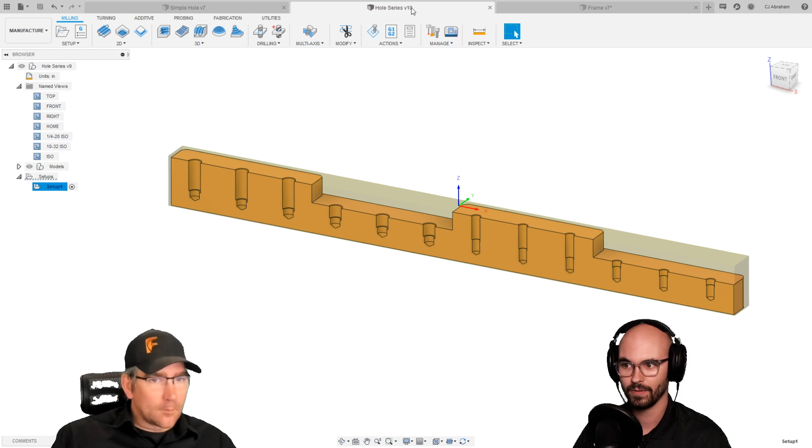And the first model I'll show you is just a simple block. To give you an idea of where we're headed, I also have a model here of a hole series, so the different ways you can select all these holes. And finally, we'll get to this part, which looks like it's all the same holes here, but there's lots of variations in there, and selecting these and getting them in the right order might be kind of a challenge.

So starting with this simple hole here, I just want to go over the different ways you can control applying a drilling operation. So I've got a section view here. We've added section view to the manufacturing workspace, which is a huge help. And I already have a setup, and I'm just going to select the drilling operation. And now we can start with our hole here. It's a 1/4 inch hole, and it has a flat bottom.

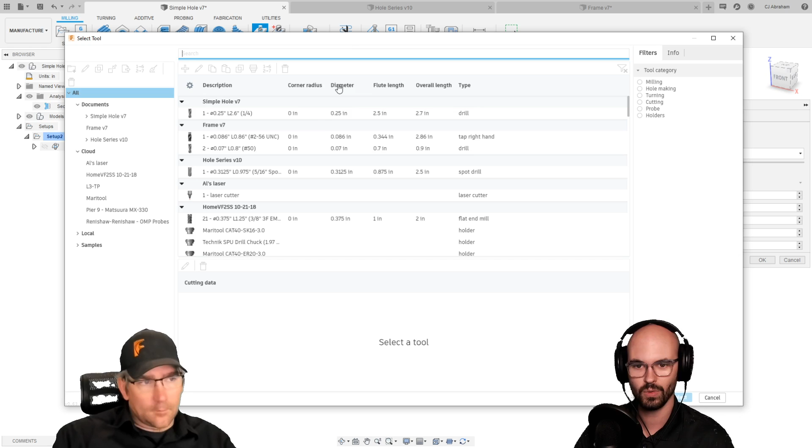And you know, when you drill holes, you have a drill tip angle, 118 degrees, 140 degrees, whatever that drill will be. There's ways to adjust that. But let's go ahead and select a 1/4 inch drill. And you can see here I'm using the new tool library preview, and I have a 1/4 inch drill already in this document. And if you want to see how to use the new tool library and all its cool filters, there's a video for that we posted the other day.

Okay, so I've got my 1/4 inch drill. I'll go over to geometry, and by default, the selection method is selected faces. So if I select the face for this hole, you'll notice that we get a selection that recognizes that hole from top to bottom. And the tool tip has gone to the hole bottom. It hasn't gone past it yet. Okay, so it automatically recognizes the top, recognizes the bottom, and the position. That's pretty easy.

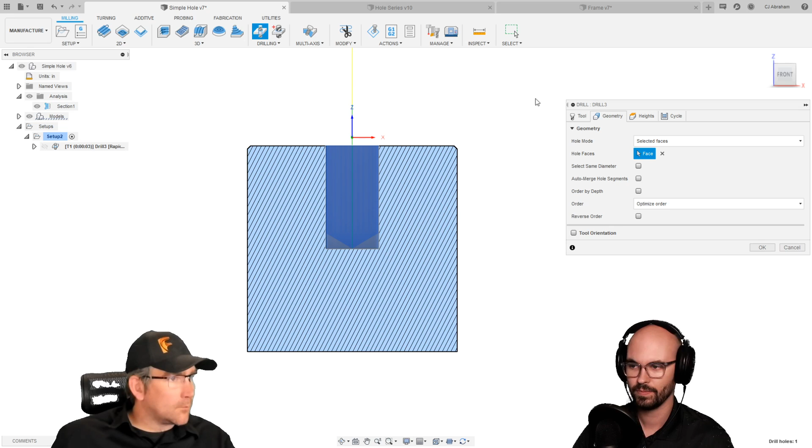If I did want the tool to go past the bottom by that angle, on the heights tab at the bottom, there's an option called drill tip through bottom. If I turn that on, you'll notice that the drill tip will now go past the bottom up to the full diameter of the drill. And this will be calculated based on the angle that you put in the tool definition. So 118 degrees, 135 degrees, 140, whatever your drill angle is, this distance will automatically be calculated.

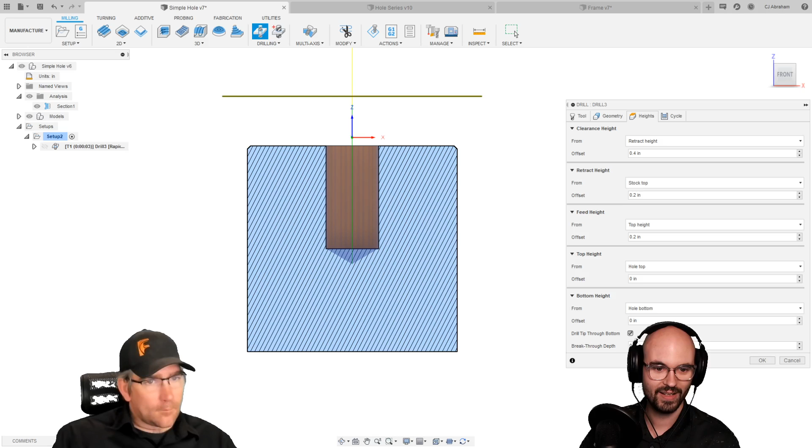And I need to hide my head because I'm in the way. I'm going to hide you too, Al.

Perfect. Hide me too. Yeah.

So this number down here, breakthrough depth, this is the additional distance that the hole is going past the bottom of the hole. So right now it's 0, which means we're not going additional distance past the bottom of the hole. If I type in, for example, 100 thousandths, you'll see it adds a distance to that preview. So the full diameter of the drill is now going 100 thousandths past the hole bottom. Okay, super easy. I'm going to set this back to 0.

And for the last basics of just having one hole, on the cycle tab, you have lots of different options for your drilling operation. We call these drilling, counterboring, chip breaking, but these are all meant to map to drill cycles on the machine. So for example, what we call counterboring is really just a drilling cycle that will dwell at the bottom of the hole and retract. Okay, so whatever drilling cycle corresponds to this selection will be posted out.

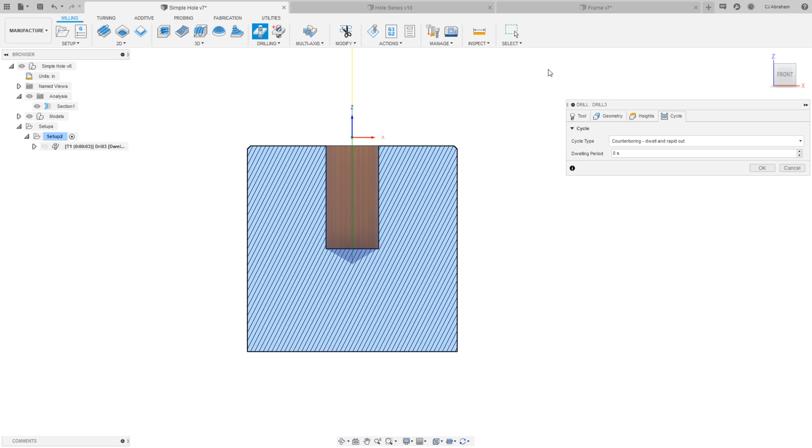Okay. A couple things to note here is that I didn't add any other features that would represent a drilled hole in real life, like a chamfer on the top of the hole, the drill angle at the bottom. We can add those back in. So instead of an extruded hole like this, let's suppress that feature. In the design workspace, I can add a hole. So I just need to have a single point here.

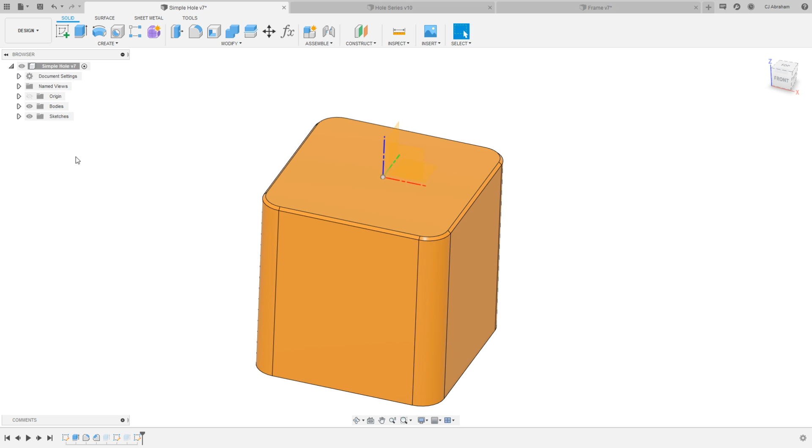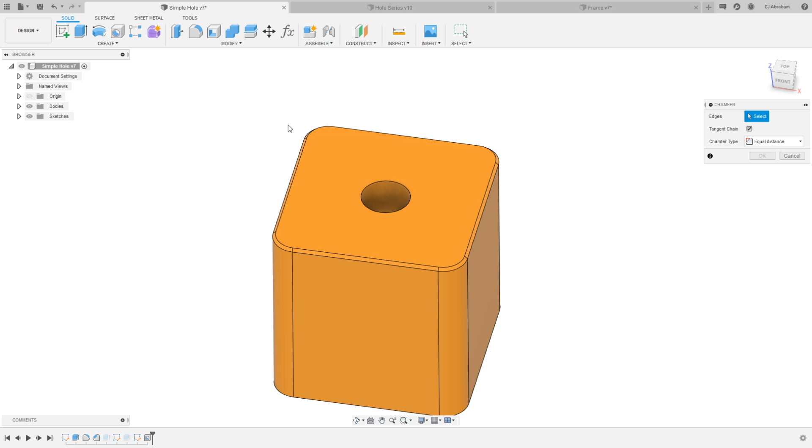Okay, finish that. If I go to create and use the hole command, I could then select the position that I want for that hole. It'll place it right there. And when you use the hole command, you do get the option to add a drill tip angle. And then once I create that hole, I can also add a chamfer feature on top. 15 thou chamfers are about my favorite size.

And now back in the manufacture workspace, if I look at the section view, we have the chamfer on top, we have the drill tip on the bottom there. So what does it look like to select the face of this hole for this drilling operation? Let's go ahead and select our tool again. All right, so now I'm going to select that same face, but there's a couple of things we need to make sure of. So one, you'll notice that the hole top and bottom is now only recognized to be the face that we selected. It doesn't include that chamfer at the top, and it doesn't include the drill tip angle at the bottom.

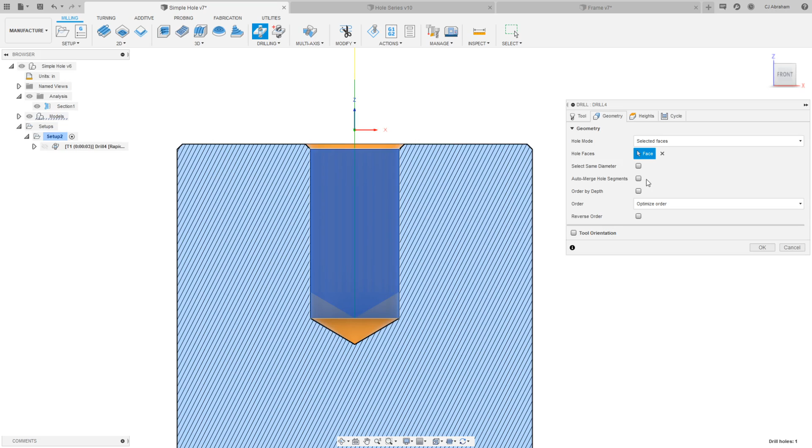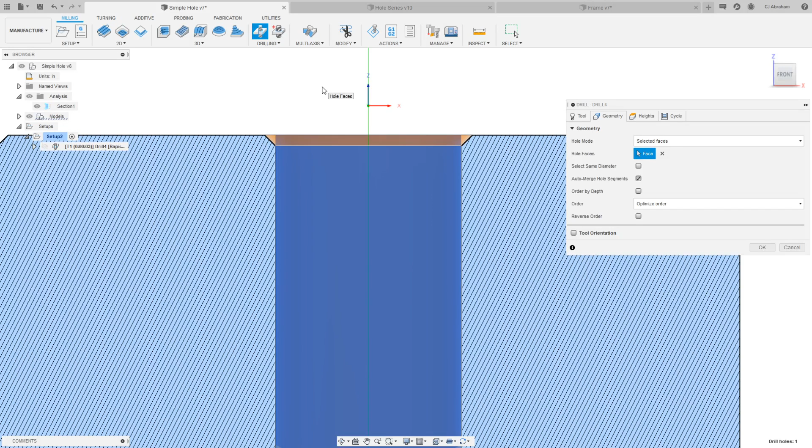If I turn on this checkbox here, auto merge hole segments, it was kind of faint there, but what it does is it looks at the hole that you've selected and it will work its way up the model until it no longer finds concentric features anymore. So this is really handy if you're doing counterbore holes because you can select the drill diameter, or you can select the face for the through hole. And when you turn on auto merge hole segments, it will recognize the entire hole feature from top to bottom instead of just that segment you've selected.

Okay. And again, to drill the tip through the bottom, I just need to turn on this checkbox. And you can see there it matches up perfectly. I've used a 118 degree drill. The feature was made to be 118 degrees. So that's really nice.

And while we're here, I want to point out something that might be confusing to users using the drill operation for the first time. You'll notice that the green line here, which represents the area that the tool will feed, we start feeding the drill way off the top of the hole. And that's because the feed height is set by default to be 200 thousandths from the top height. Note that all of these heights are relative to each other. So we have the top height as the hole top, and the feed height, which is the plane that the tool starts feeding from, is 200 thousandths above the hole top.

If I set that to 0 and zoom in a bit here, you'll see the green line has dropped. It might be kind of faint for some users. Sorry if it's too faint on the video.

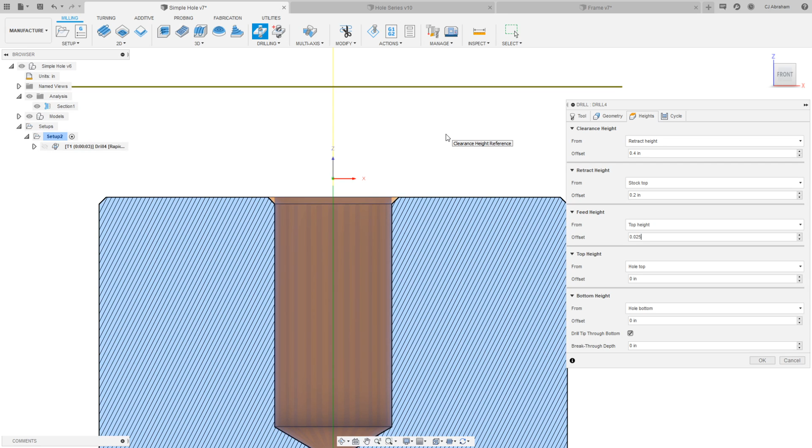But now the tool is starting exactly on the hole top, which might not be desirable because it rapids up to that point. So it's usually good to include a small distance in the feed height. That way you don't rapid all the way up to the face and then start drilling. Handy tip for someone that might be confused by that.

Al, anything you want me to include here? No questions yet. I think so far people are picking up just fine, CJ.

Great. Okay, so with the basics, you know what might be interesting though, now that you've got the heights shown, just show how those heights are relative to each other. So if you adjust maybe the feed plane, show how the retract plane can be related to the clearance plane, is related to the retract height, for example. Yeah, so the most obvious one right now is that I have the retract height and the clearance plane shown, and if I drag one, it moves the other.

All right, so if I type in a number like 375, nope, I hit enter too quick there. So if I change this number, it changes the other relevant planes.

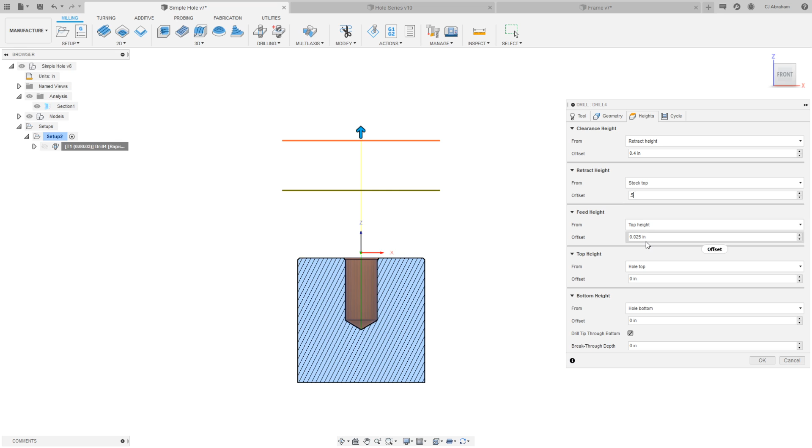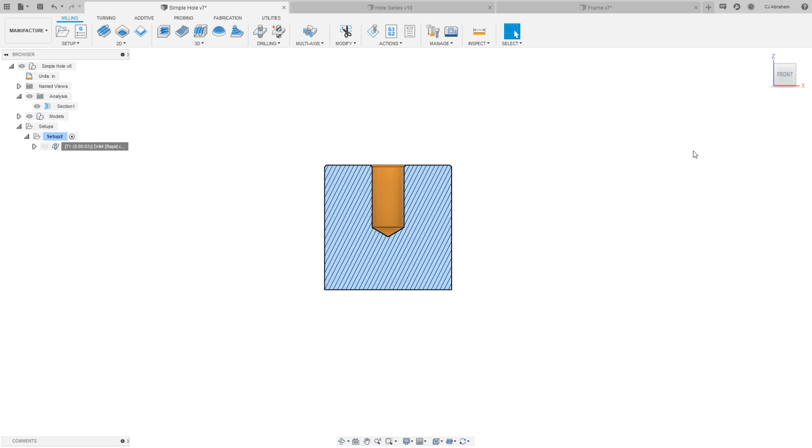When the plane is relative to a feature on the part, the plane is not shown. So for example, the feed height right now is shown from the top height, so it's not showing that plane. If I said, let's say from model top, see now it shows the plane. Okay, that's a helpful tip if you're wondering why those planes weren't shown. Good. I think that's the basics. Let's jump into some more interesting stuff.

Yeah. So selecting multiple holes is really where the drilling operation starts to shine. We can do all the selections that we want for one hole, and it will automatically detect all the other instances of the hole, whether that be the same diameter, distance, and things like that. On this particular part, I have two sets of holes. The 6 holes on the left are 1/4-20. The 6 holes on the right are 10-32. So let's just start with the 1/4-20 holes over here.

The way I've modeled this is I have the minor diameter drill, and then I have the major diameter for the tap. And this is handy to model because once you select these, you can modify them in the design workspace, and your hole depths automatically will adjust the drilling operations. So let's start with spotting these holes.

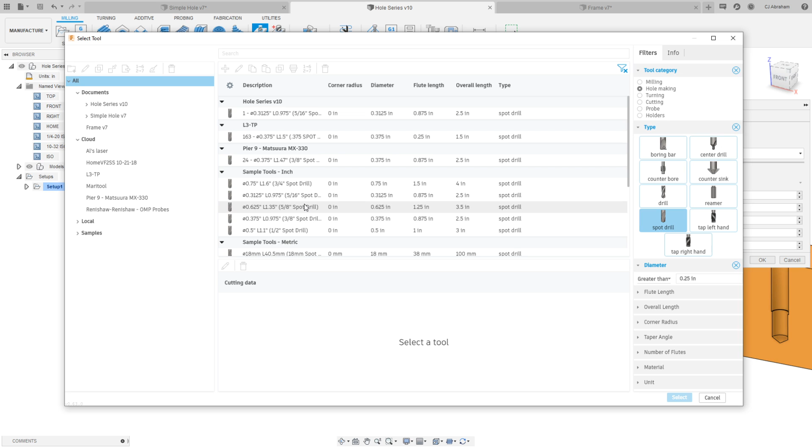So I'm going to select a tool. I don't have a spot drill in this operation or this document yet. So I'm going to look for a spot drill. And I want the diameter of the spot drill to be greater than 1/4 inch. So now I'm looking at all spot drills available in any of my libraries. So let's go ahead and use this 3/8 spot drill. Okay, so I've got my spot drill.

Go over to geometry. And on this part, I already have a chamfer on the top of the hole. It's pretty common that if you select a hole and you want to get a specific diameter on there, you have to calculate using trig to figure out how deep your spot drill needs to go for the angle and things like that. In Fusion, all you need to do is select the face, and it will automatically detect the depth that it needs to go to.

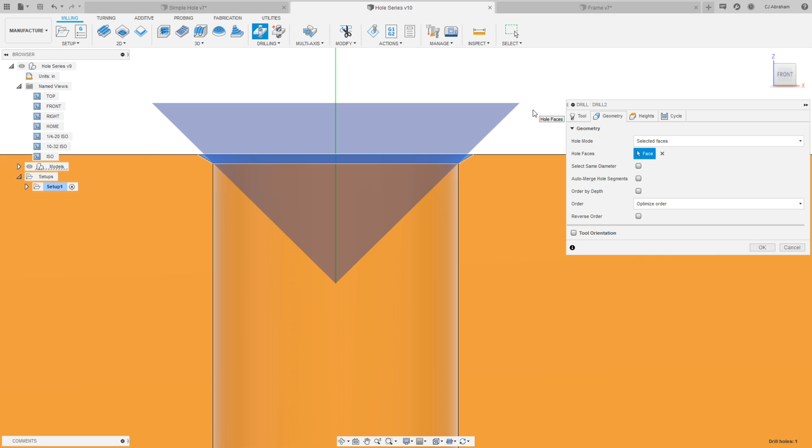And I've modeled that chamfer as a 120-degree chamfer. I like to use 120 degrees when I'm doing tapped holes. And I've selected a 90-degree spot drill. So you can see it's automatically gone to the depth that it can in order to not violate that feature, in this case, the bottom of that chamfer. And that was determined by just declaring the bottom height to be the hole bottom.

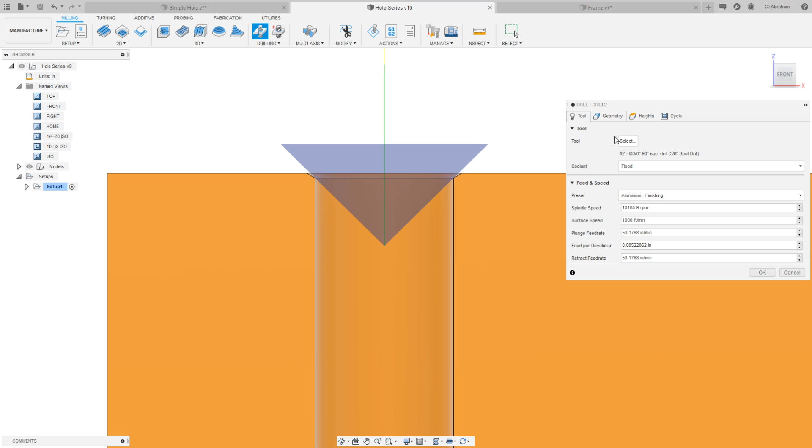Also, right now I have that tool as a virtual sharp, so a 90-degree zero diameter tip. If I go back to the tool definition, so let's take a look at our hole series. Looks like I already had a spot drill in there actually.

If I edit this tool and go to the cutter tab and look for tip diameter, this value here, I could put in something like 50 thousandths. Maybe it was a little hard to see on the preview there, but now the tip of the spot drill is flat, which is extremely common for these tools. And that will automatically be calculated and included.

Okay. And just as a quick aside, sometimes it doesn't seem like it's important to dimension that flat when you're modeling it inside of the CAM system. But the reality is that that endpoint of the tool is how you're going to touch the tool off in the machine. And if the tool is touched off at the wrong distance, you're going to end up with these kind of spot drills or chamfers that are the wrong size.

And also, if you use that tool to chamfer the edge of the part, you'll end up with something that's not the same size. And people often miss. The reason for that is in the CAM system, you didn't define the width of that flat, and it thought the tool was a different length than it actually is. Exactly.

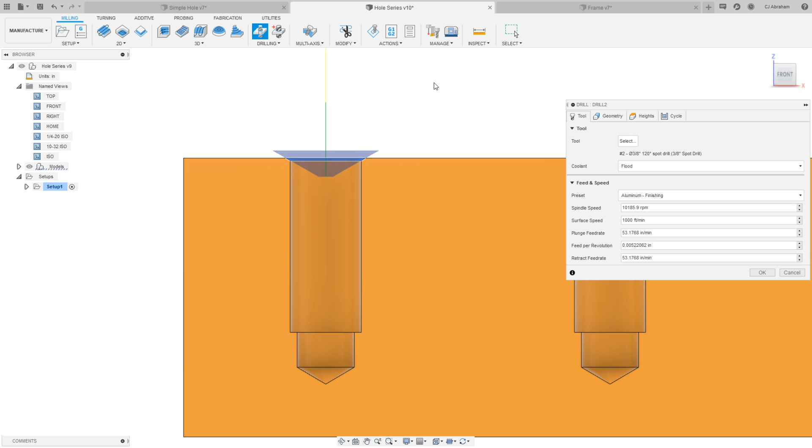Okay. Let's see. Now that we've got our spotting operation, I just did that for one, right? Let's go back to an ISO view of this whole thing. I just did that one spot drill operation on that one hole, and I wanted to include at least all of the holes for the quarter 20s. So if I turn on the checkbox, select same diameter, it finds all the same diameter holes, or in this case chamfers, that are on this part. So it found all 6, including the ones that were at different heights.

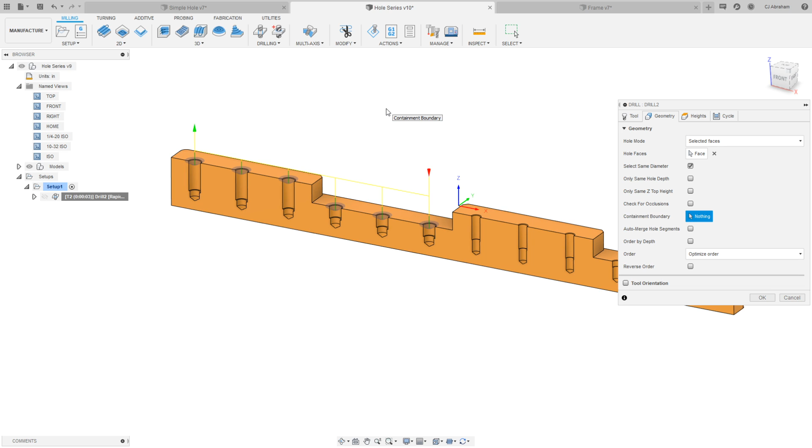And right now it's ordering them from right to left, which is okay. This would mean that all 3 on the right get included and get posted in their own canned cycle, and then the left 3 would. If we were on a part where the instances were staggered, we can separate those out by the canned cycle, and I'll show you that in the next part because they are staggered in that one.

Let's say that I also wanted to spot drill the holes on the right for the 10-32. I could easily do that by including one of these chamfer faces in the selection. So by clicking on that chamfer, I'm both cutting the chamfers for the quarter 20 holes and for the 10-32 holes, and it's automatically detected the depth between the two. So this chamfer is being cut at a shallower depth than the quarter 20.

Let's use the named view there. Okay, so very handy. Looks like I exited the operation without saving there. Okay, so you can select multiple diameters in one drilling operation to select all of your holes.

Okay, how's chat looking so far? Any questions? Anyone want to play stump the chump? A side question about setting a default for the number of flutes in a drill. Maybe we can address that later. I'll just answer it in the chat for now. Yeah, okay. Sounds good. All right, so moving on.

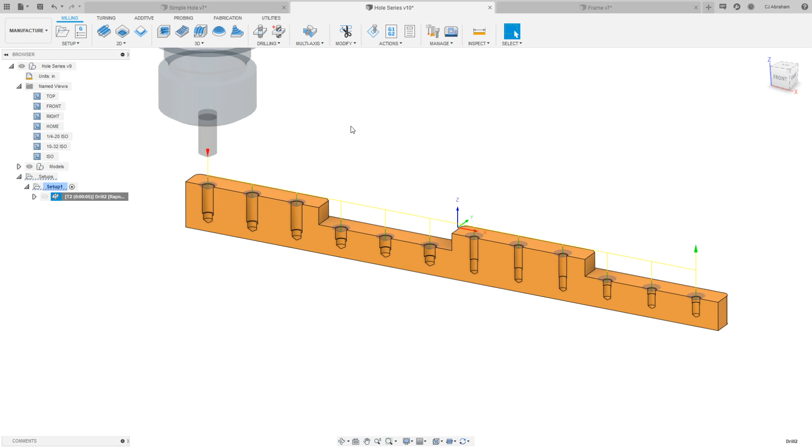Now we want to do the minor diameter drill for the quarter 20 hole. So I'm going to select the drill operation, select the tool. Again, I don't have a number. I happen to know off the top of my head it's a number 7 drill. So I'm going to search for a drill. And in the search bar here, I'll type in number 7. And it should show me a few here. And it does. Here's the number 7 drill.

I have some cutting data for different materials in here. The aluminum drilling preset will work just fine. These are for high-speed steel. If you have carbide drills, obviously, you can push them much faster. Go over to geometry now, and I'm going to select the face that represents the minor diameter. Okay, and let's zoom in on that.

And you can see right now it's currently rapiding to almost the bottom of that hole and then doing that one section. So we want to turn on auto merge hole segments, and you can see that automatically found all the other concentric segments that went up to the top of the model. I'm going to turn on drill tip through bottom. Okay, so that's exactly what I want there. And then I'll turn on select same diameter.

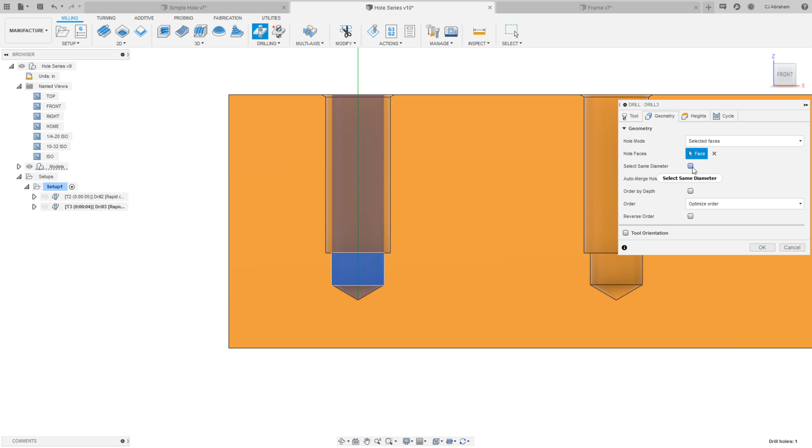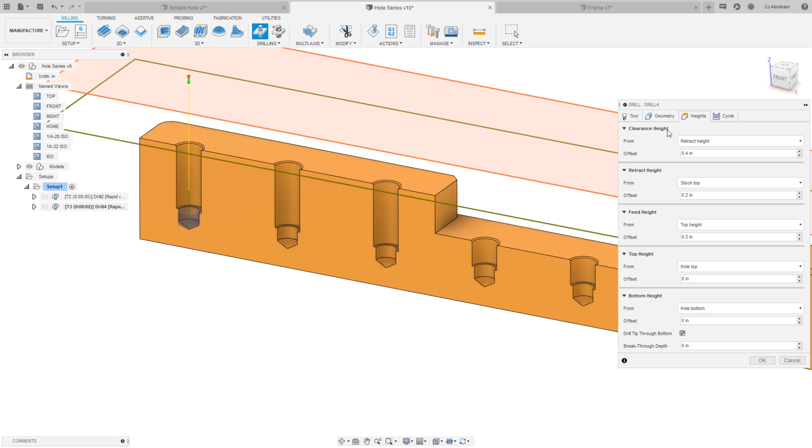And let's zoom out here and see what happened. Oh, I clicked the named view and it bumped me out of the operation. Let's try that one more time. It's much quicker when I go through it the second time. And auto merge hole segments.

Okay. So you can see when I have all those settings enabled, it found all of the same diameter holes, and it also detected the correct top to bottom distance of each hole. So through one selection, I was able to drill all the holes on the left and all the holes on the right. However, let's say that you really needed to separate out the selections of these because maybe you needed a longer drill for one and a shorter drill for the other, or you want to inspect them differently.

There's all sorts of reasons that you will want to control what you're including. So let's edit this operation, go back to the geometry tab, zoom out a bit so we can see. And you'll notice that when we turn on the select same diameter checkbox, there's some options that appear and disappear. And the two that I want to point out here, one is hole depth, so only same hole depth. And then the next one is only same Z top height.

Okay, so the same hole depth, what that does is it will only find holes that go the same top to bottom distance. So not the same absolute Z depth. What it's looking for is, in this case, any hole, like on the left, I have the hole going, for example, 3/4 of an inch. So it will look for any holes that are going 3/4 of an inch deep, regardless of where the hole starts. Okay. And I can't demo that right here because I don't have any holes that are different in that respect.

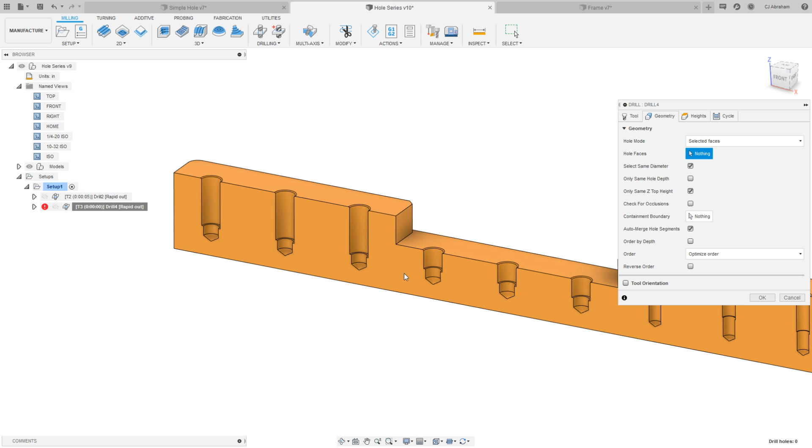But I have this option, select same Z top height. Okay. So, oh, actually, that's kind of a problem right now because the selection's all the same top height. But if I include this guy in here, okay, despite the same diameter being on all these other holes over here, it's only finding these holes because they are starting at the same Z top height. If I uncheck that, of course it finds the other ones. Okay, so that's really handy if you're trying to select as many holes as you can automatically, but be smart about which ones you want to include.

And why would you do that? I mean, I can think of one example. Maybe on the deeper holes, you're using a different drill, or maybe a pecking cycle on the deeper holes. Just trying to give some examples of why you might want to do that. Yeah, you might want to change the drilling cycle type. You might need to dwell in one longer. You might need to take larger pecks in another. You might need to use a different tool. I mentioned that one earlier. Maybe you want to select a different tool for different depths of holes.

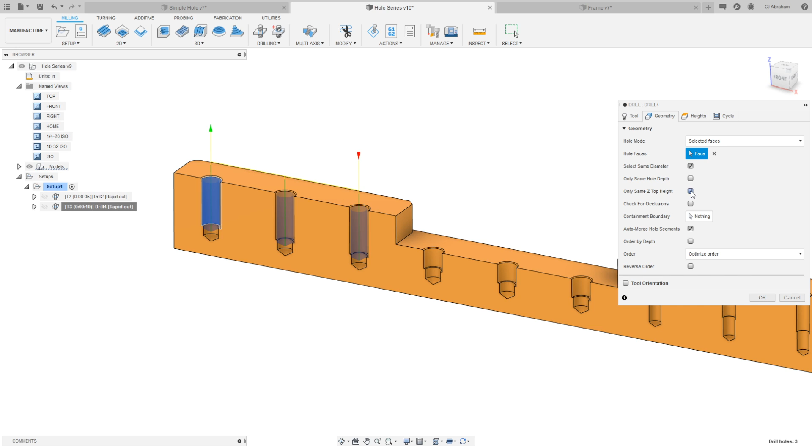Another one could be like on the part that I'm going to show next. On the real part that I made that inspired that one, I had to inspect the holes in the order that they were cut. So I'd have to cut the holes, inspect them, sign off on that, and then run the next ones. That was just part of the inspection process for that part. So there could be non-machining, not strictly machining reasons you might want to order things in a particular way or include or exclude.

The next one that is pretty special is the containment boundary. So let's select this minor diameter one here at the bottom again so we get our holes. The containment boundary allows you to select an area that limits the hole selection. So right now I've got that, so that's going to exclude it. I think I'll need to draw a boundary. So I'm going to design. I'm going to draw a sketch, and I'll just draw a rectangle around these holes. Right now it's not important to dimension it or anything.

But if I edit this operation, go to geometry, and then make a selection for containment boundary, notice only holes that are in this containment boundary are included in the same diameter selection. So this could be good if you need to also exclude specific holes. You can draw a boundary around all the holes that you want, then you draw a small contour around the holes that you want to exclude, and when you make that selection, it will include or exclude just what you need based on its location.

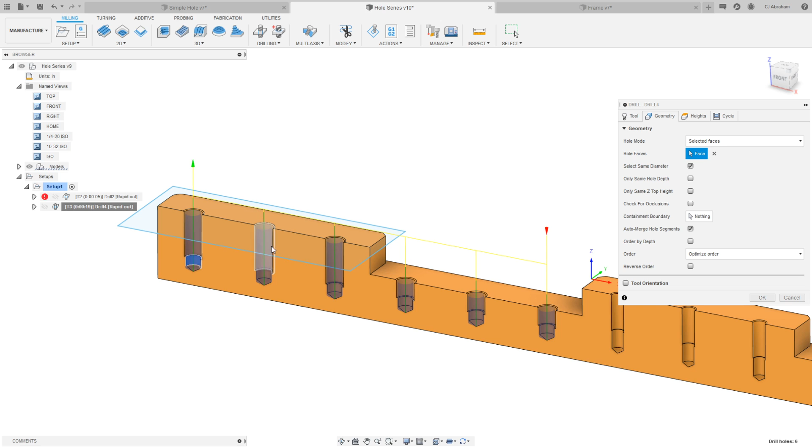Okay. We've been spending a lot of time on this one, but that's okay. Bottom line here is it's drilling all the holes that I want, so that's good. Let's go ahead and hide that sketch. And we'll move on to the tapping.

So I'm going to select a 1/4-20 tap. I can just type that in here. And I get a few options. Tim's library had some 1/4-20 options in there. The Pier 9 Matsuura library has some in there. Here's an example 1/4-20. And this time I'm just going to select the major diameter there. That gets me the depth that I want.

Turn on select same diameter. Finds all the same diameter holes. And make sure auto merge hole segments is on, so it's looking at the hole from top to bottom. And that's exactly what I want.

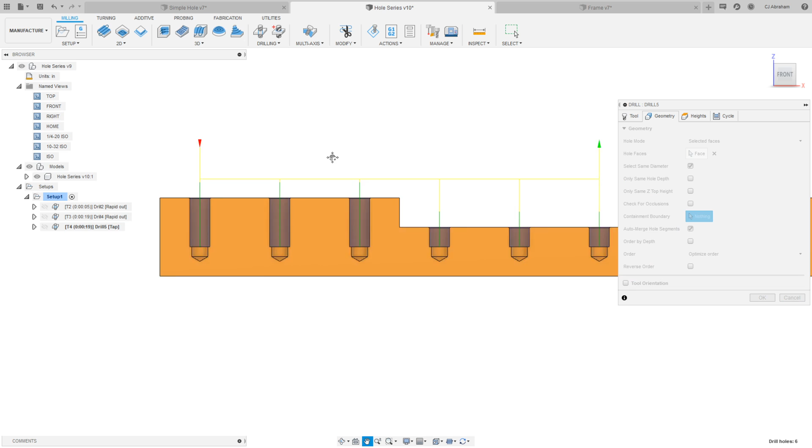Let's say that when you tap a hole, the first couple of threads aren't full threads because that's where it's entering the hole from. So let's say that you modeled this in such a way that you need this section to be all full threaded. If I go to the heights tab, there's two ways you could extend how far it's going.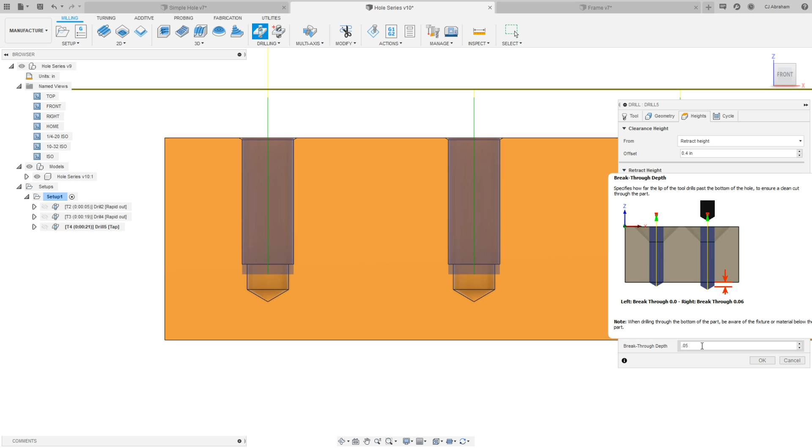You could also drill tip through bottom and specify a distance, right? So if I put in 50 thou there, it'll go 50 thousandths past the selection. So that's handy. One thing to note is that this breakthrough depth is always a positive number. The alternative method would be to leave this selection at hole bottom and put in a negative offset. So I could put in minus 50 thousandths and it does the exact same thing.

Okay, so if you're trying to select faces on the model and it's not going exactly where you want it to, you can adjust these numbers relative to the selection. Another thing to note is that in the past, I've received models and drawings where the model did not match the drawing at all. For example, a hole was modeled to be 1/2 inch deep, but they actually wanted the drill to go 3/4 of an inch deep.

If you needed to address that, you could say from hole top, I want to go minus 3/4 of an inch. Okay. So this is kind of a hybrid where I've recognized the hole top already, and on the drawing it says this needs to go this deep. So if you type in a negative value relative to the top, that'll get you exactly what you want there. I've seen that all too often where the model doesn't match the drawing exactly. So this would be a method to get around that. Okay, let's set this back to defaults.

Any other questions or things I'm missing here? There are some questions around using the hole recognition feature, and maybe we'll just keep that until the end. So I'd keep going. Okay, great.

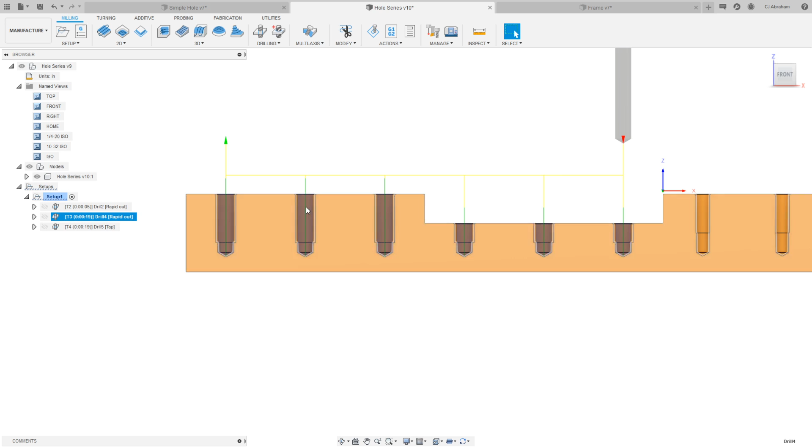And you notice through this whole process, I just did it for the 1/4-20 so far, not the 10-32, but it's not picking up the other holes there. That's because the same diameter function is very accurate. It works really great. Okay, so I think we've done enough on this model. Let's jump over to this part because I think this really demonstrates the strengths of using the select same diameter option and utilizing those switches.

So if I do a wireframe view of this part, okay, we have a couple of holes on the corner there. So there's 8 larger tapped holes, and then there's all these little 2-56 holes. And what's happening here is that there's a longer hole and a shorter hole, and the long hole on the upper and lower level are the same depth, and the shorter holes on the upper and lower levels are the same depth. Okay, I hope that's obvious.

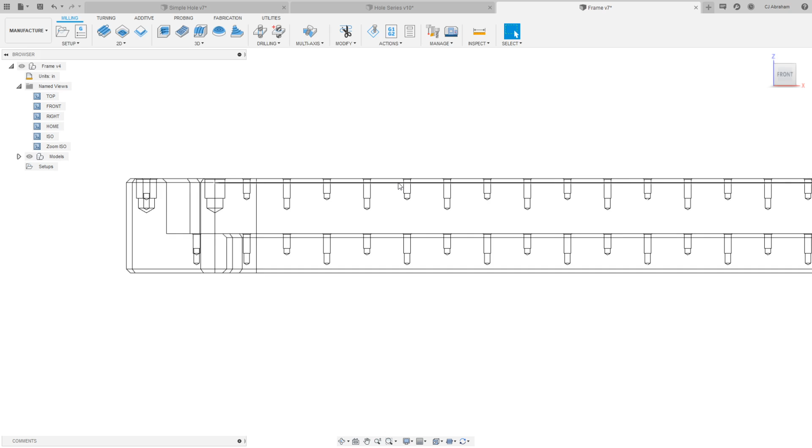But the way these are called out on the drawing, let's go back to, first let's go to an ISO view and go back to wireframe. Sorry, visible with edges. The way these are called out on the drawing is there's series A, B, C, D, and here's the short ones on the upper level, here's the short ones on the lower level.

So it's really nice to be able to separate these out per operation, especially since the real model that I got, the values called out on the drawing were not what I saw on the model. So it was important to break those out and be able to type in some values manually. But let's go ahead and spot all these holes.

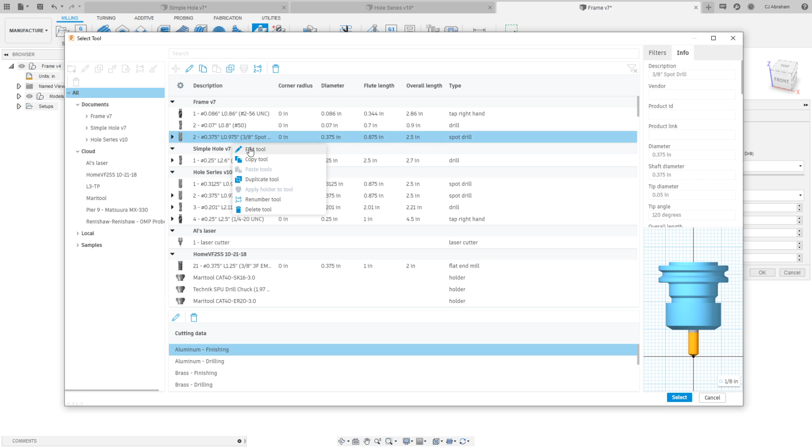And I'm going to use that 3/8 spot drill. No, that's too big actually. Let's just make sure that the tip diameter is small on that one. Okay, so leave it 120 degrees. Tip diameter, let's just make the tip diameter 10. Keep it simple. Okay, so I've got my spot drill here.

Now, instead of selecting the faces that I want for this, I'm going to change the hole mode to diameter range. So what this does, it allows me to specify a range of holes that it will look for. And let's go up to, what was the other one? Okay, so it found all those holes there.

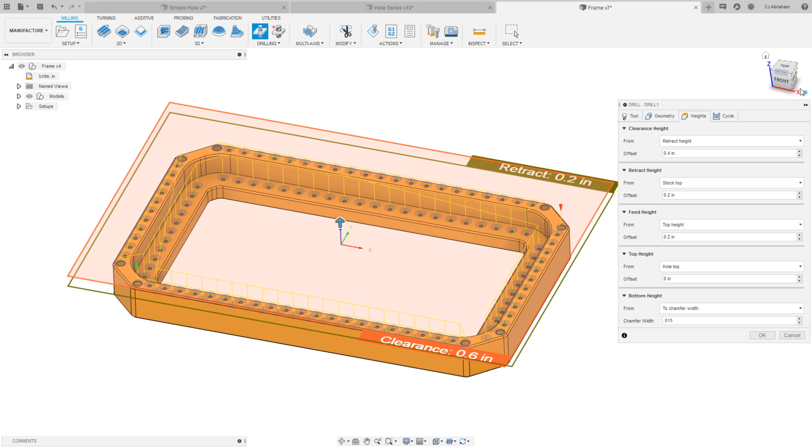And I should be able to put in a chamfer width and say I want that chamfer to be 15 thousandths. There you go. So with one operation and some intelligent geometry selections, I was able to spot all of these holes regardless of size. And let's just do a front view here to verify. Oh, actually, it looks like a couple of those... Oh, that's just because I'm looking at this 1/4 inch hole in the back here. All these other ones are perfectly fine. Looks good to me.

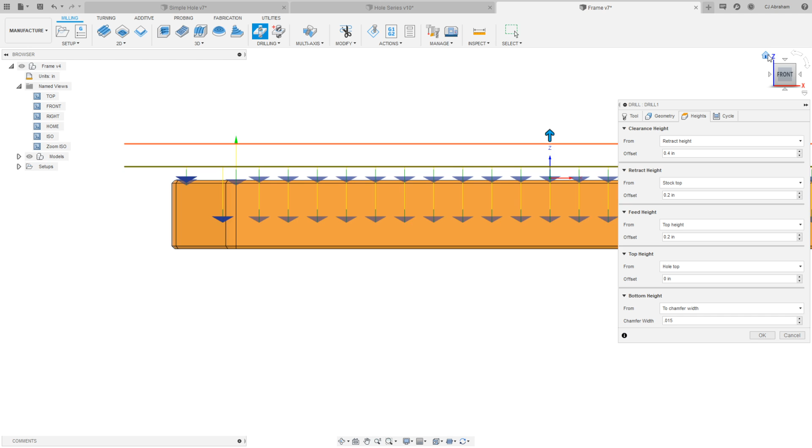Okay, so we'll keep that spot drill operation. And for the 2-56 tapped hole, it's a 70 thou diameter tap drill, which is a number 50 drill. So I need a number 50 drill. Type in 50. Gives me a couple options here. Oh, I've already got one selected, so that's good.

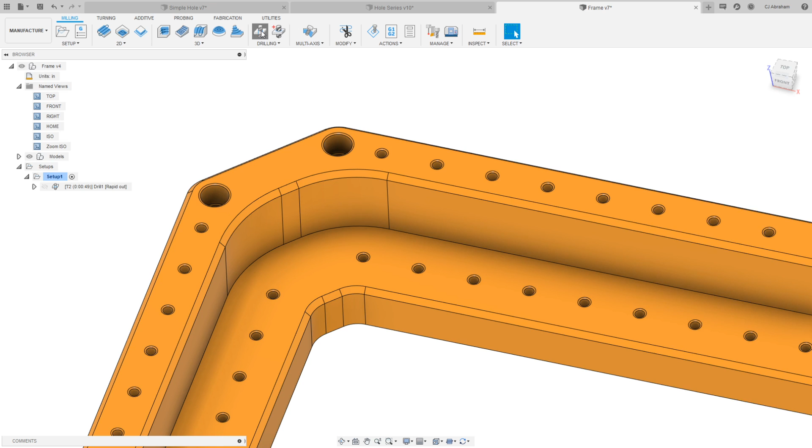Okay, so I'm going to zoom in on one of these holes, and I've modeled it the same way where I've got the minor and major diameter in here. So I'm going to make sure I just select that minor diameter. I'm really searching in there for that. Well, where'd my operation go? Just a second here. You know what? Did I lose? Oh, I don't even have the operation open. Whoops. Okay. Number 50 drill.

Zoom back in there. Okay. That's the hole that I want. Turn on auto merge hole segments. Okay. So it's looking for everything that's concentric going up. So that's good. And then I'm going to zoom back out for this, but I'm going to turn on select same diameter, and it's found everything. Okay. Which in and of itself isn't that bad. That's perfectly fine. But I do want to separate these out.

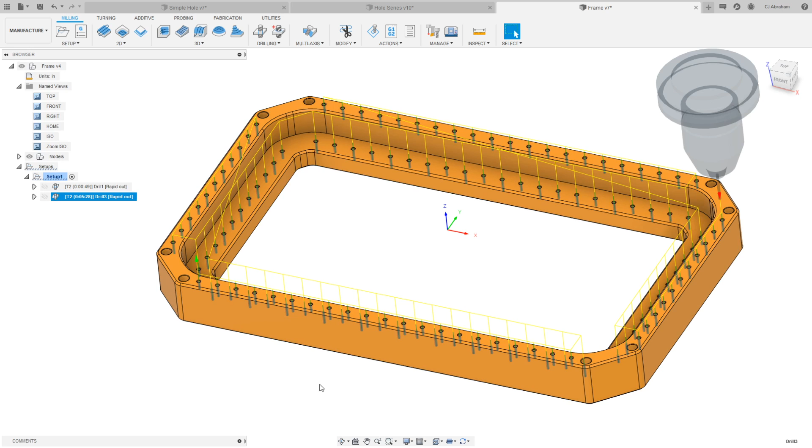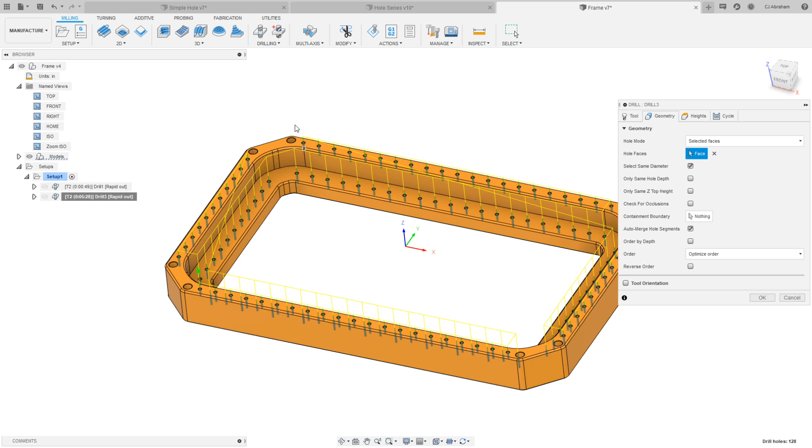And you notice it starts over here on the right, and it's kind of spiraling around the part, doing all those holes in the order that it finds. And that's because the order is optimized. And I'll check out a few of these other options. But let's just make sure that we're doing the holes that we want. So first, I only want to do the short holes on the upper level. And so this first hole that I've selected is one of the short ones. So first I'll turn on same Z top height.

Okay. And it's already pulled the same hole depth ones. And that's because the hole that I selected in there on the minor diameter starts at a different depth than these longer ones here. So actually I didn't even need to select same hole depth. Okay, so that's pretty handy there. I can call this one Series A.

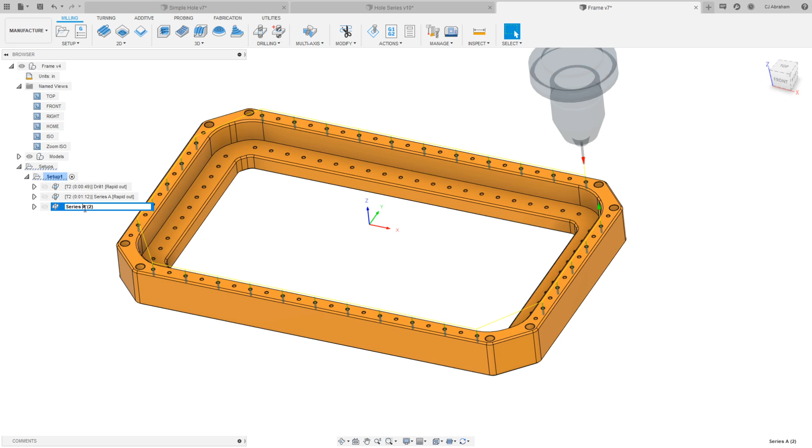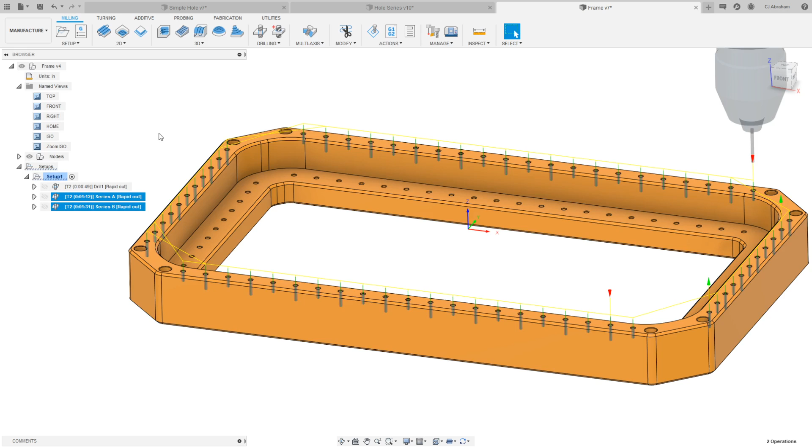And I'm going to duplicate this operation because I've got all the same settings I want already. I'll call this one Series B. And I'll just select the minor diameter on the other hole next to it. Okay, super easy. And if I highlight both those operations, you can see all those holes have been drilled, but I was able to separate them out by their depth. So I'll do the same thing 2 more times. Call this one C. Call this one D.

Select one of the holes down here for that one. Select OK. Open up the Series D operation. And I'm going quick just to demonstrate that it's really fast to do this when you're using this operation. Even without feature recognition, it was really quick to do all of those and separate them out.

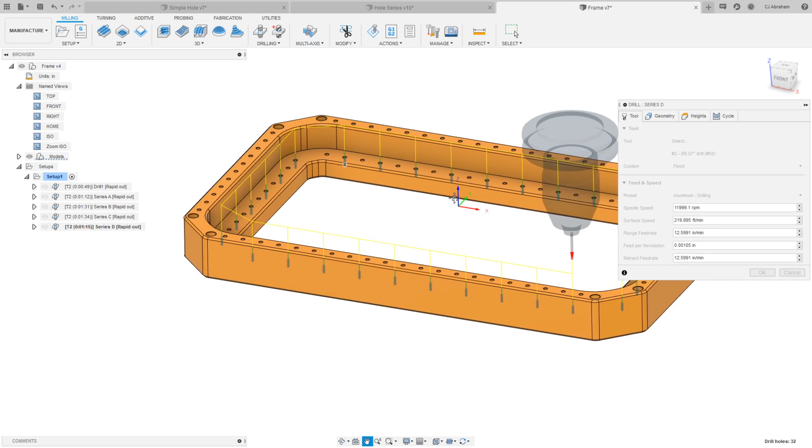And now, let's say that this whole series here, maybe it was modeled differently than it was called out on the drawing. So now just for this series, I can say, well, from the hole top, I need to be minus 200 thousandths. Right? I know it seems kind of asinine to do it this way. This isn't something we'd show at AU main stage. But when people are actually making parts, this stuff becomes really handy.

Hopefully Steve Hooper wasn't listening. Al, do you have anything you want to add to that? No, I was just following up on a few tangential questions about sketching, to be honest, in the chat. So okay. You can stay focused on the drilling side. Cool.

Well, unless someone has any specific questions they want to go over, I can get into some other more advanced things, because I have a default expression that I want to demonstrate, but it takes a minute to set up. So I don't see any specific questions yet. So why don't you do that default expression thing and walk us through that?

Okay. So there's a really cool trick that you can do regarding a default expression, a template, and the formula for tap drills. And shoot, I can't remember the gentleman that demoed this to me, but I need to make sure I give credit where credit's due. If I can find his...

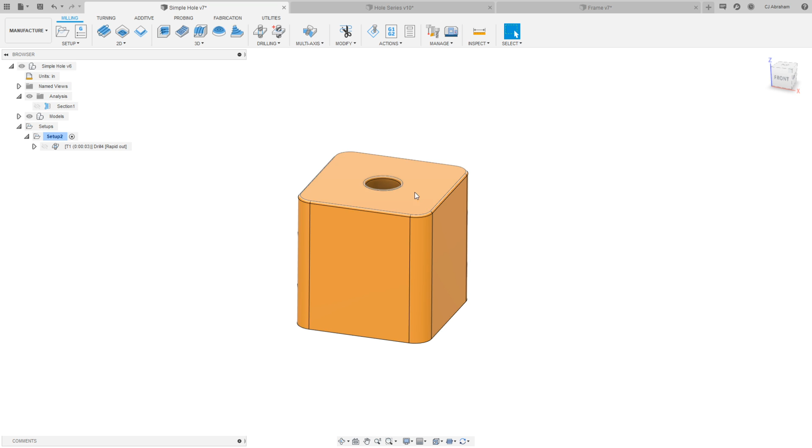Yeah, Phil Brown. I got to give kudos to Phil Brown for showing this to me, and I thought it was brilliant. So here's what we're going to do. I want to create a template operation that automatically recognizes a minor diameter hole for a 1/4-20 tap.

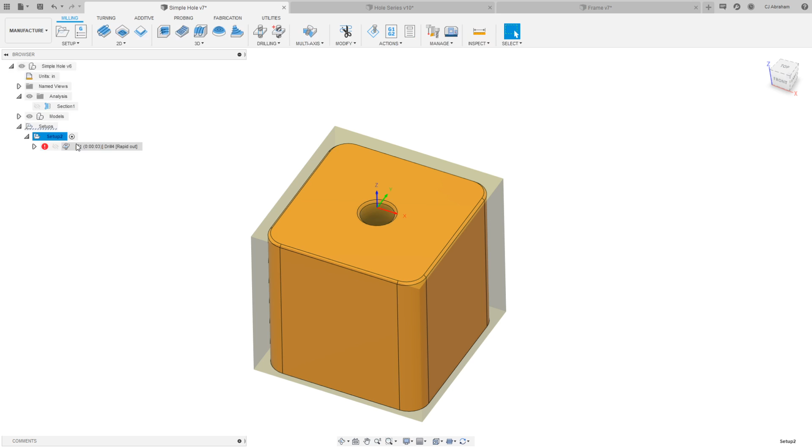And so what I'm going to do is go back to this hole feature. I need this to be 0.201. Okay, so I have a 0.201 hole here. And what I would like to happen is I would like to create an operation that when I select a tap, it automatically will calculate the minor diameter using the formula for calculating like a 75% thread, and it will automatically find the correct hole, actually regardless of whatever tap I choose.

So first I need to find what that formula is. So excuse me for a moment while I Google this. Okay. That wasn't it.

Well, the formula for metric is a lot easier than the one for imperial. Maybe I just need to do that. Let's do it for a metric diameter thread. That way I don't have to search for this giant formula, because the idea will be clear. Maybe just start walking your way into this and show how you can first link the tool diameter to the selection and then get a little more advanced.

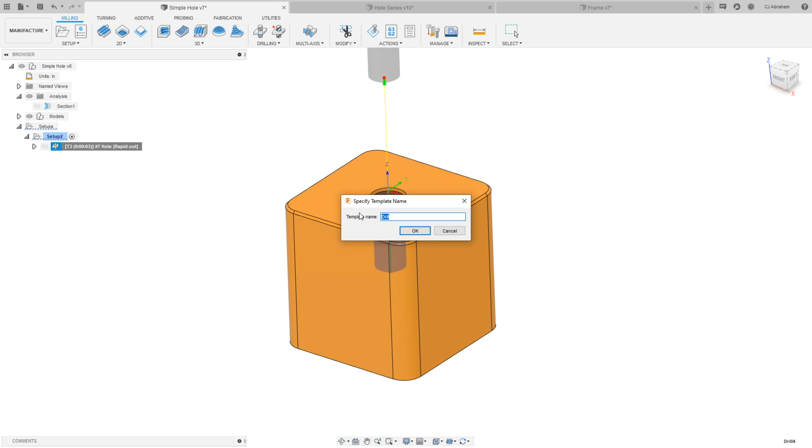Okay. So let's save this as a template. Let's call this number 7 hole. Save this as a template. So store as template. Template name will be number 7 drill. All right, we'll delete this operation and let's recall that template. So create from template number 7 drill. When I generate this operation, it detected the hole. It already found it. Okay.

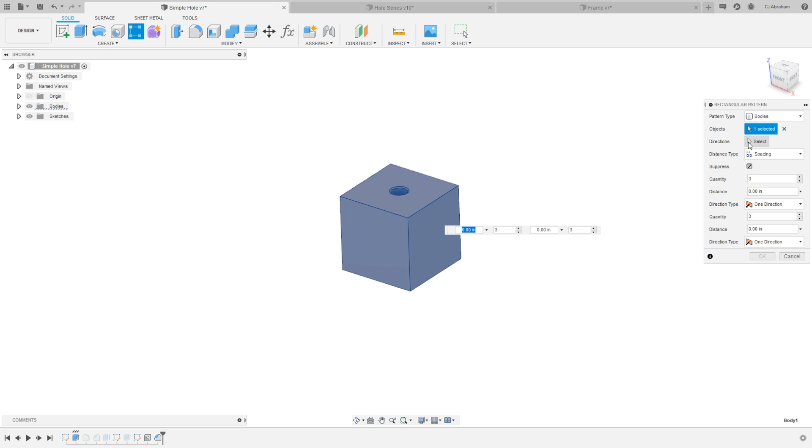So in concept, you could use this idea of putting the tool diameter in the range for an operation, and it effectively becomes an automated selecting drill operation. Let's mess around with the design a little bit. Let's suppress these features here. Let's do a linear pattern of the body. Let's do a few of these. They're 1 inch wide. And let's combine. Whoops.

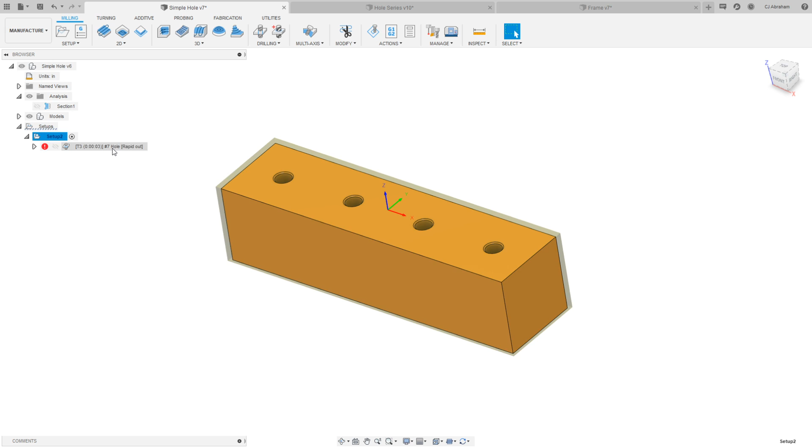Okay, so I've added some holes in there. If we go back over to manufacture, regenerate this operation, finds all the other ones. Okay, so this would have happened with select same diameter as well, but you would have had to start out by selecting a diameter. In this case, it just finds the hole based on the tool that you've selected. Maybe just draw a new part with a hole the same size and copy and paste the operation to show that. Yeah, that's a good idea.

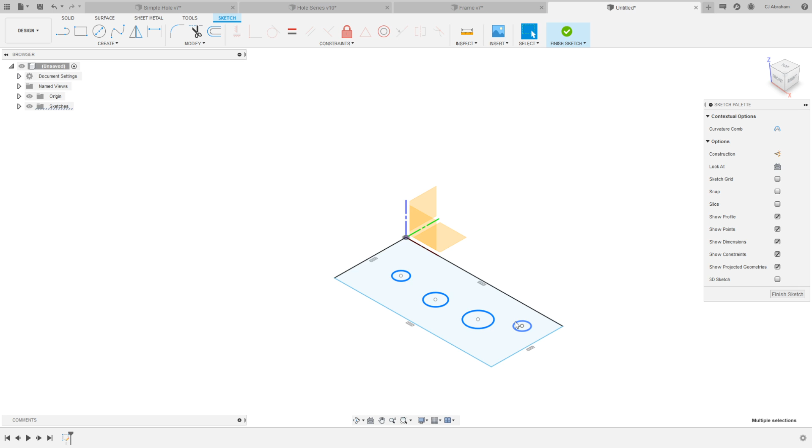Just do some random placement of those, make them equal. Okay, that looks good. Make that 2 by 1. Extrude this up. Okay. I'll create a setup so that I have something to paste into. Jump back over to this document, copy the operation. Jump back over to my new part. Oh, actually, I didn't even have to do that. I could just create from template. Sorry. But copy and paste between is also good for people to see.

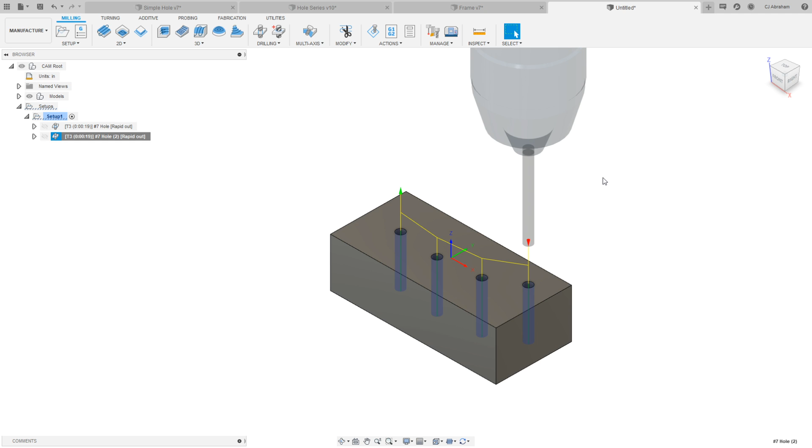Yeah. So that was an operation generated from the template. I could just as effectively paste the operation that I copied and generate that toolpath, and it makes a selection. So the way this could be used, if set up correctly, is you could have a spot operation, a minor diameter drill operation, and a tap operation be in a template. And if you're using diameter range and calculating the diameter range in this way, you have automatic selections of tap tools that do all the operations for you. Really awesome.

What you could even do is have multiple of those operations together in the same template. And if there's holes, it'll drill them. And if there's not holes, it won't. But an empty operation's fine. Exactly. If I change the diameter of these holes to something that is not the tool diameter, these operations simply just don't drill those holes. Nothing. Cool.

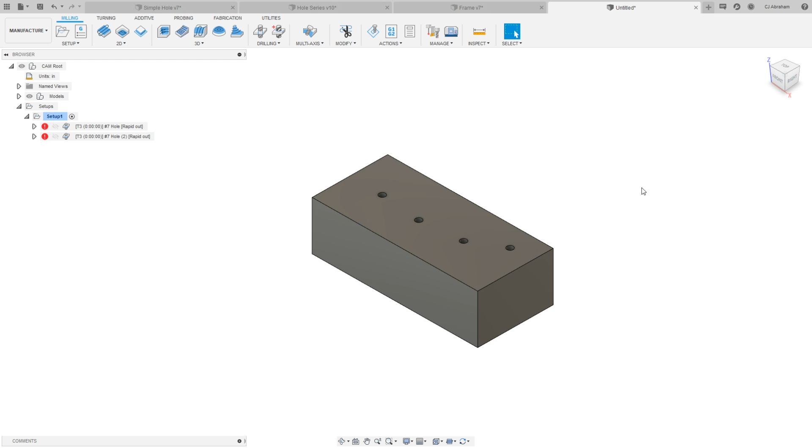That's about all the content that I have. Let's give a minute for people to ask some more questions on drilling. And while that's happening, there's a user that asked how to create text in a sketch. And it's a complete tangent, I know. Yeah. But do that for 30 seconds while the folks that are more interested in drilling spool up some questions. Perfect.

So for the text, I'll just extrude a little rectangle here. Okay. And now I'm going to start a sketch, and I will draw a line. Okay, this is where the text is going to go. And on the create dropdown, there is a text option. So if I select text, or I'm sorry, I didn't have to create that line first. That's muscle memory from something else.

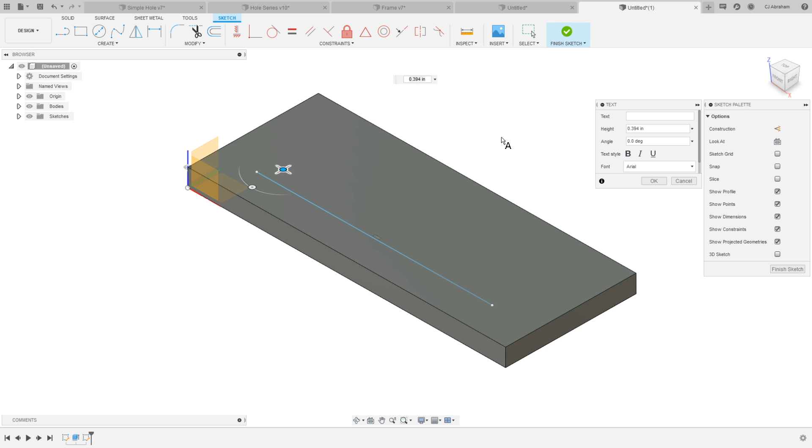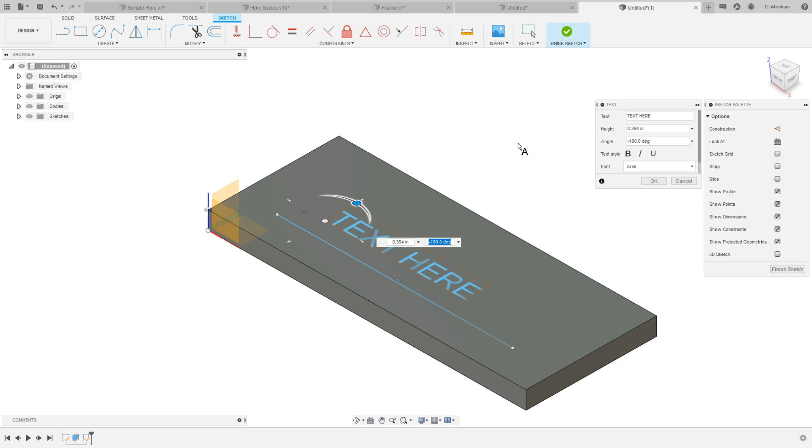But all you have to do is select the text option, determine where you want it to go using this point object here, and you can type in your text. Maybe just to kind of take this a couple steps, because we're talking about associativity and why associativity matters. Create that text, and then let's create an engrave operation selecting the text. And if you select the text properly, then when the text changes, the toolpath will update accordingly. So yeah, be a neat little thing to show.

And again, while CJ's doing that, it looks like there's some questions around templates or some excitement around templates as well as drilling. So if you've got some more specific questions about how you could use templates, feel free to throw that in the chat.

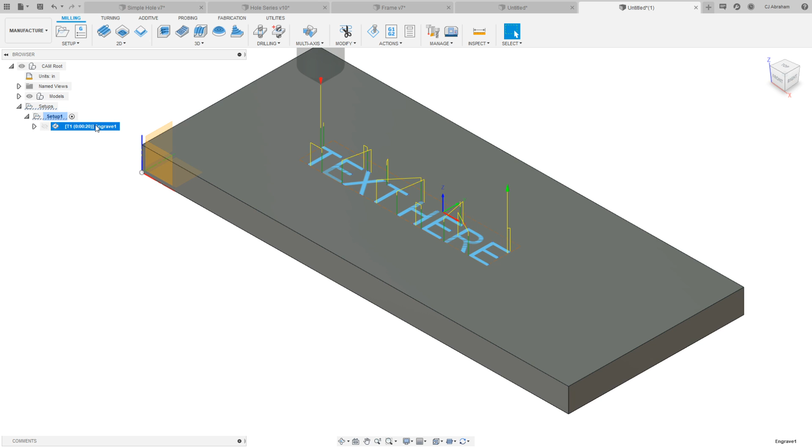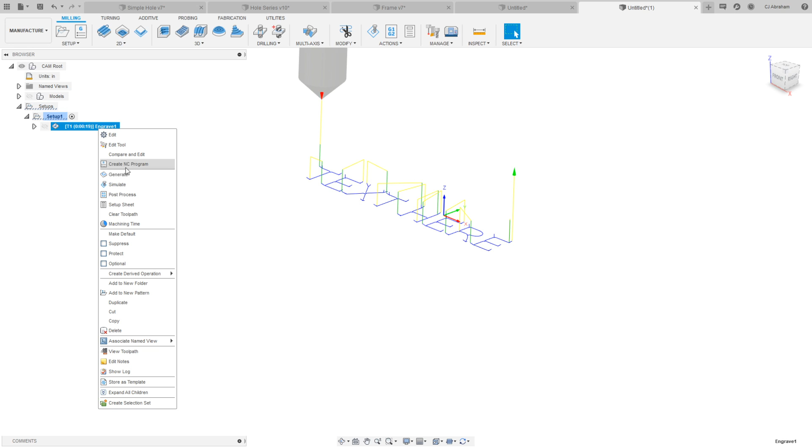Okay, and then select the text for that operation. So see, when he selected it, though, he didn't select it individually. He selected the highlighted text, and it got all of the sketch at the same time. Exactly. Bit of stock on the top that makes it look like it's cutting too deep. Yeah, that's right. Let's get rid of that from the setup there. So make all this 0. Good call out. There we go.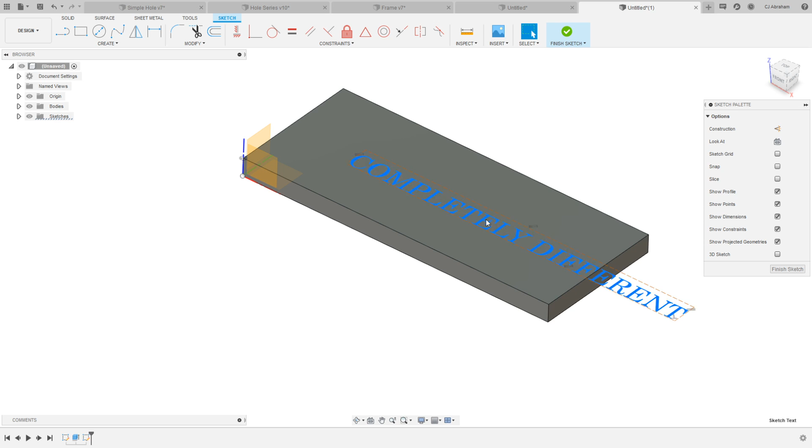Yeah, and that's just based off of selecting. I selected one letter, but it highlighted the whole text. So all of the text is included in that operation.

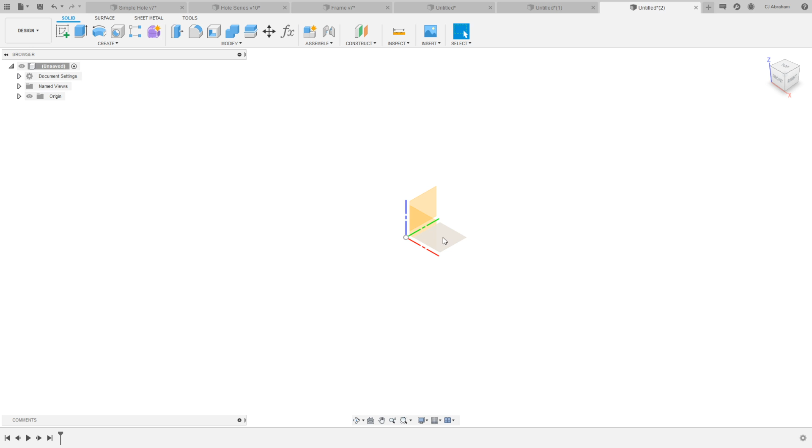Okay, I see a question. I'm just trying to understand it. The process of threading in drilled holes. So maybe show some of the tap cycles, as well as might be worthwhile showing thread mill as well. Yeah, let's make a bigger hole for that one. Yeah, and then we could actually show that the thread milling operation also has select same diameter. Yeah, which is a great improvement. Now let's just do 1/2 inch here.

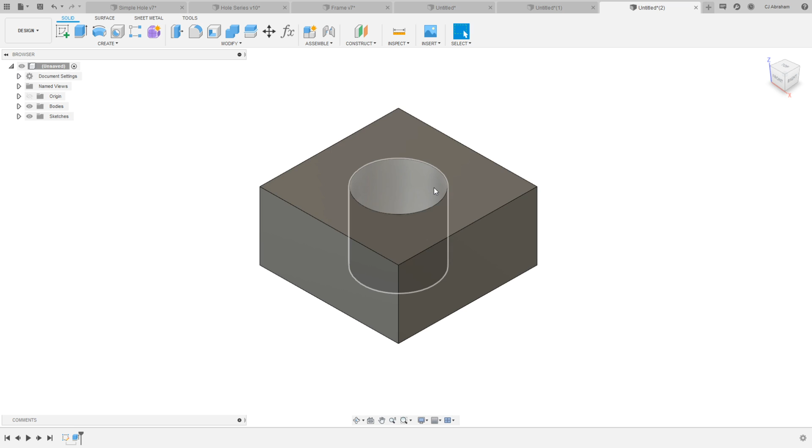Okay, so let's assume that we've already drilled this out to the minor diameter. It's a 1/2 inch. I guess a 1/2 inch 13 thread, for example, would be fine here. So if you were going to tap this. To be honest, CJ, you're getting all kinds of people excited when you started talking about metrics. So any metric examples will have the current viewers pretty excited. Oh, yeah? Okay. Well, what's an appropriate metric thread here? This would be 12. How about 12 1.5? So here we go. Instead of 1/2 inch, we're going to make this 12 millimeters. Nailed it.

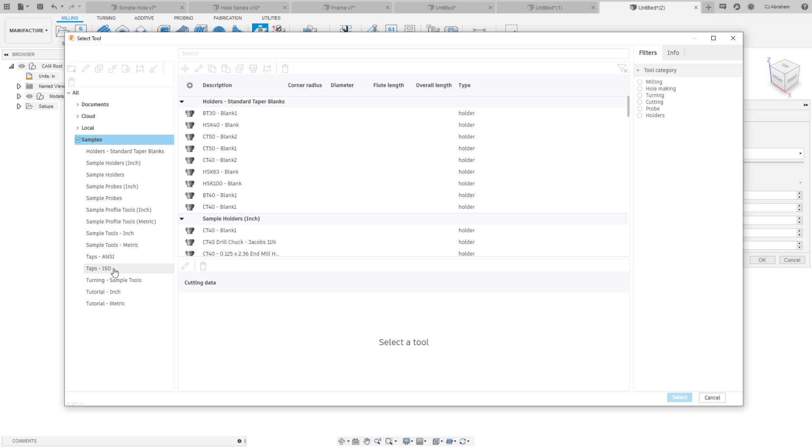Okay, so we can tap this. And we do have a couple of options for tapping. Let's look at the ISO taps. I want a 12 1.5. There we go. Okay, select the hole. I can give it a little bit of breakthrough here. And for the cycle, because I selected a tap tool, it automatically defaulted to the tapping cycle. We also can explicitly ask it to do left or right hand tapping. Generally, tapping and right tapping result in the same cycle selection in a post.

But the next one that's special is tapping with chip breaking. So this is like peck drilling, but with a tap. So it will go a specific distance with the tap, then pull back out. Then it'll go in a little deeper and come back out. Really good if you're doing hard materials, or you're worried about your tap breaking, or you're worried about chips packing in the hole, things like that. Works really well. I can attest to it working perfectly on the Haas machine already.

You would have to make sure that your post is set up to do peck tapping if you're going to use this. Sometimes it needs to be configured on a per machine basis. Next would be thread milling.

Sorry, Al, did you have something you want to say? No, you're good. Okay.

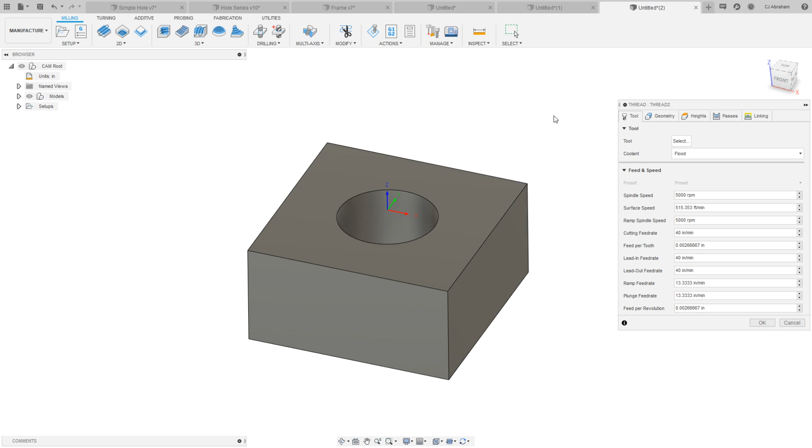So I did that kind of quick. Under 2D operations, we have the thread operation. So thread, bore, and circular are all for cutting circular features. The thread operation specifically has some settings that are nice for creating thread milled holes. And for the tool, you can choose a thread mill, or you can choose a tool type like a flat end mill or bullnose end mill or a slot mill. Basically, any mill that represents the tool that you want to use is compatible with the thread operation.

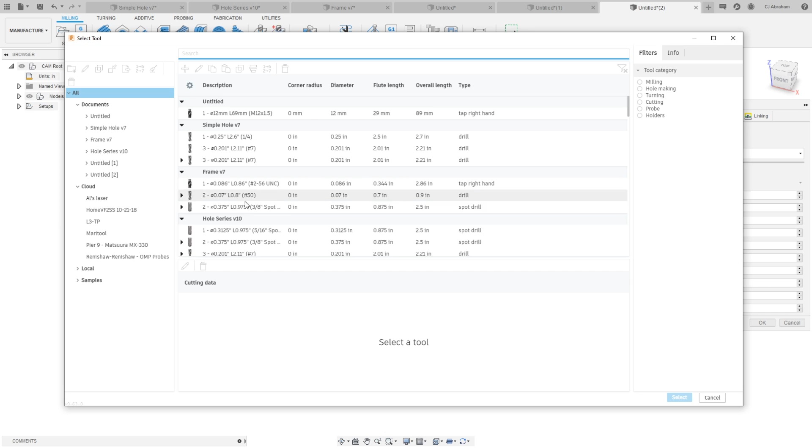So I can, for example, just make a 6mm flat end mill. Overall length, yep, that'll be fine. Okay, so we got our tool. Go into geometry, select the hole, and you see we get a preview for the thread milling operation. And we have the same select same diameter option in the thread milling operation. So if you're drilling a bunch of holes and then thread milling them out later, you have the same options to do that.

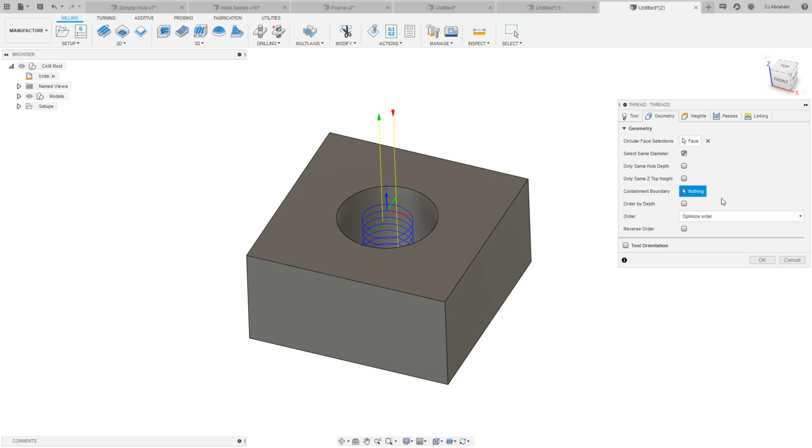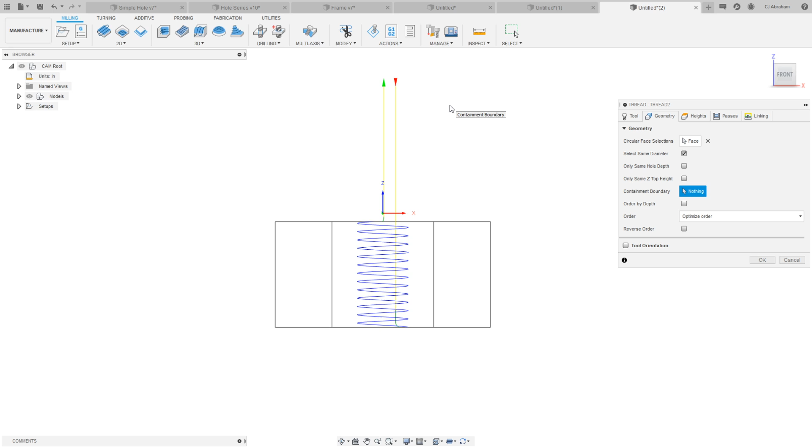Okay, that includes same hole depth, same Z level, and containment boundary. So the same selections you use in the drill operation, you can use here. As far as the heights go, you'll notice right now, if I do a wireframe view, the operation is thread milling the entire feature from bottom to top. And let's say you're using a multi-point thread mill, and you only needed to do one pass. There is a way to handle that.

And what I'm going to do right now is make all the lead values 0 so that we just see cutting. Okay, so you can see that the toolpath is starting down here on the bottom at about a 90-degree angle from us right now. And the thread pitch here, we said this is going to be M12 1.5. So it's going to be a 1.5mm thread pitch.

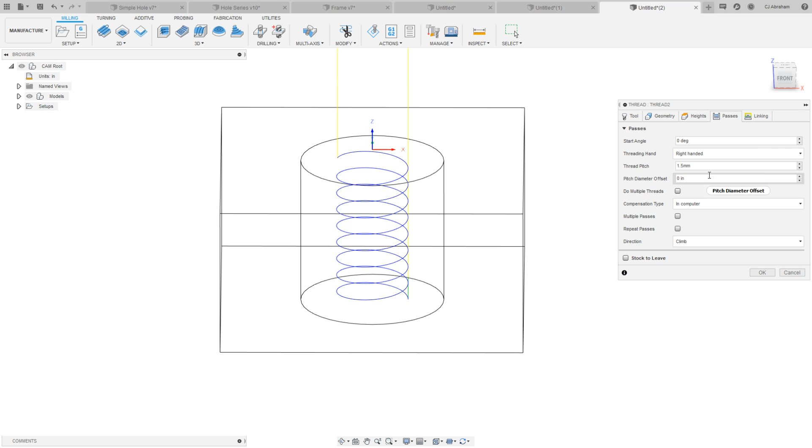And I'm going to check the name of this parameter. So I'm going to hold shift and hover over the parameter, and it should give me a tooltip that gives me the name of the parameter, which is threadPitch with a capital P. Okay, this is important. I'm going to go to the heights tab, and for the top height, remember we're going from bottom to top for this thread operation. So I'm going to set the top height to be relative to the bottom. So right now I have no toolpath because they're equal.

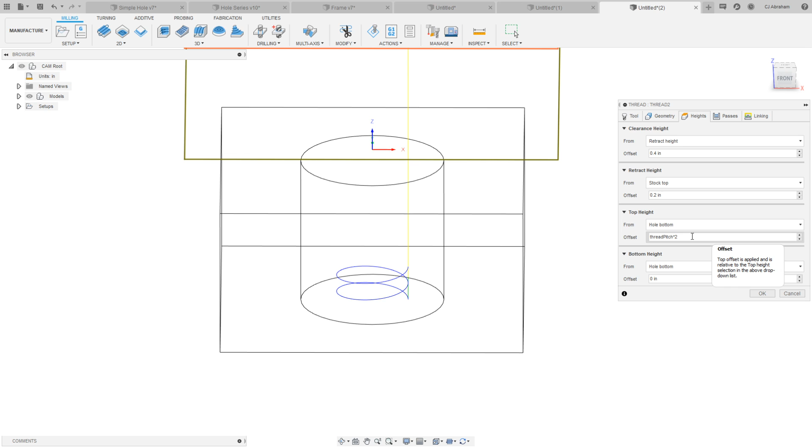And I'm going to input threadPitch. Okay, so now this is giving me one thread pitch. And I could, for example, say threadPitch times 1.5, and it gives me 1.5 rotations. Or I could say 2, and this gives me 2 rotations. So this is an easy way to give you just the number of rotations you need in your thread mill toolpath if you have a multi-point thread tool. Very good. I hope that was helpful.

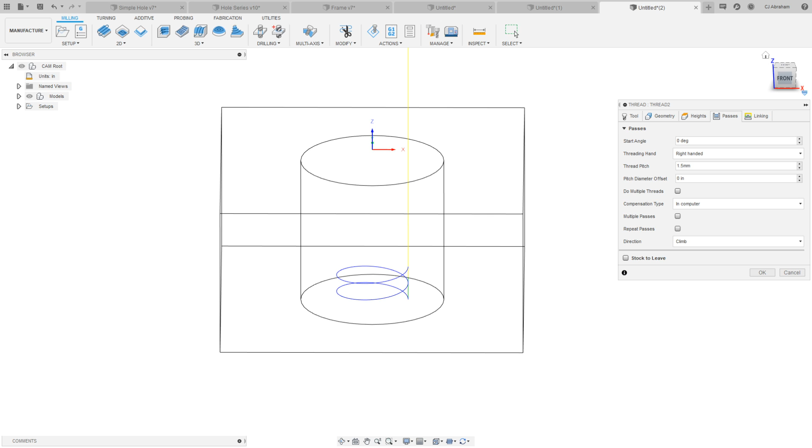Okay. Awesome. Well, I hope everybody had an opportunity to learn something on this webinar, even if it was just one little checkbox. I've been getting feedback from people reaching out to me personally, and they say, "Oh yeah, the webinar was great, and just these 2 seconds were worth the whole hour." So it makes me happy when I get feedback like that.